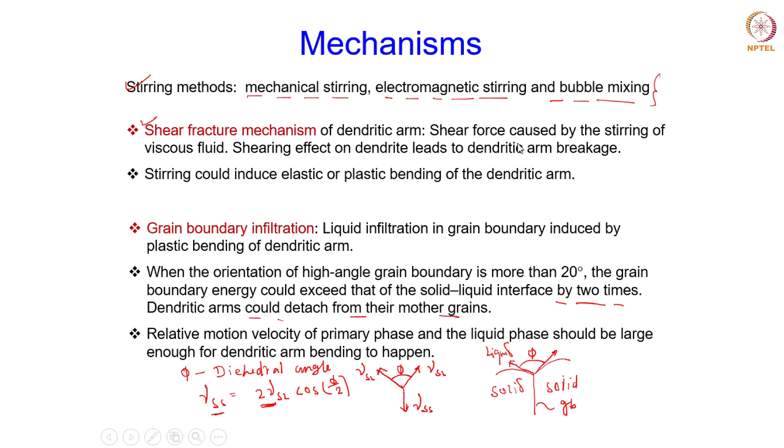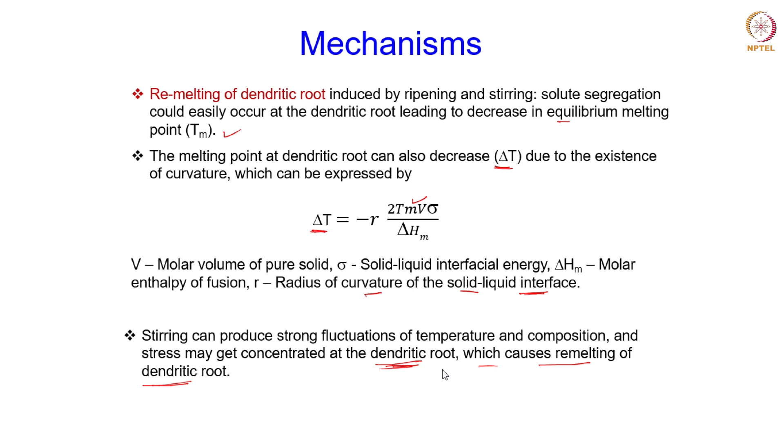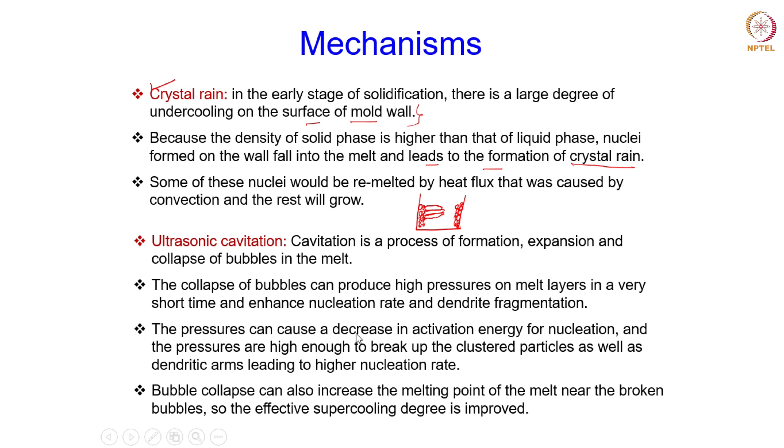Then we also talked about the ultrasonic cavitation process which is applied for grain refinement during solidification. Cavitation is a process of formation, expansion and collapse of bubbles in the melt, which basically leads to either a high nucleation rate or breakage of the dendrite arms, both leading to a higher nucleation rate or grain multiplication, and ultimately giving rise to a fine grain size in the solidified metal.

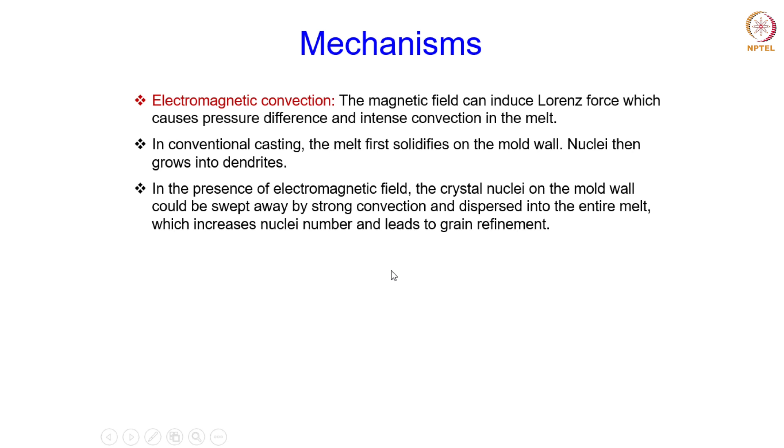So today we are going to discuss mechanisms of grain refinement which can be operational in the solid state. So we are going to discuss some solid state methods of grain refinement in this particular class today. So far we have been discussing grain refinement in the melt during solidification.

But there are certain methods through which grain refinement can be done in the solid state also, and these are basically done by applying a high amount of deformation, and such processes are known as severe plastic deformation. So that is what we are going to discuss right now and understand how this severe plastic deformation leads to grain refinement in different materials including aluminium and aluminium alloys.

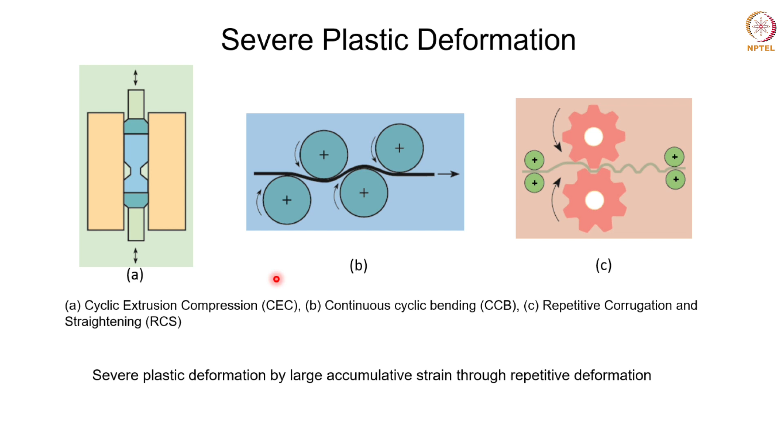Then here we have another process which again goes through a number of cycles, where the strain is also accumulative. The process is known as accumulative roll bonding. Here it not only leads to severe plastic deformation, but can also lead to bonding between two metallic sheets, as the name suggests. The process goes like this, as depicted in this particular diagram.

So you have a stack of pre-rolled sheets, as you could see. First you cut the sheets in the required size, and then they are stacked together, and this stack of rolled sheets is then subjected to rolling. And as the rolling is done through several passes, it will lead to bonding between these sheets and also severe plastic deformation, which would ultimately lead to grain refinement. But for this bonding to occur, this can be done at higher temperature.

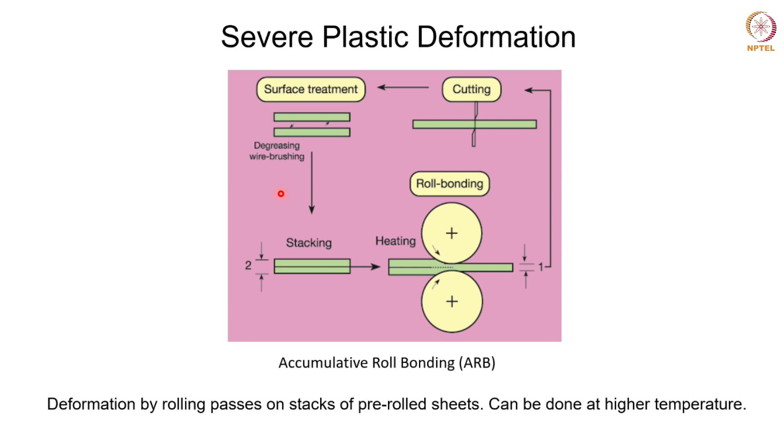So what is done over here is that this pin of the tool is actually plunged into the workpiece, and a vertical load is applied simultaneously, and the tool is rotated at high speed. So as this pin plunges into the workpiece, the shoulder will touch the workpiece surface, and as the tool is rotated at high speed, with the simultaneous application of the vertical load, a large amount of frictional heat will be generated at the tool-workpiece interface, and that will actually first soften the material.

And since a vertical load is also applied, once the material is plasticized, it will start to deform. And then as the tool is moved in a particular direction with a particular traverse speed, the material will be subjected to severe plastic deformation and it will be processed. So the material which is left behind the tool as it moves will be a processed material which has gone through severe plastic deformation and will have a finer grain size compared to the base material which is not subjected to any deformation at all.

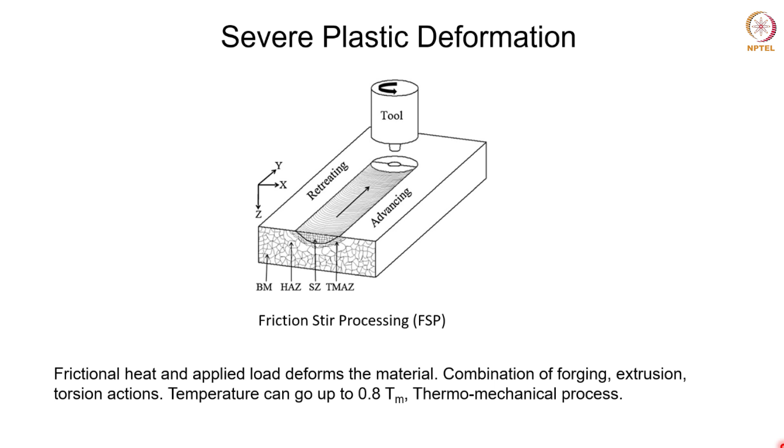So now we'll talk about the mechanisms of grain refinement, as to how exactly this severe plastic deformation leads to grain refinement. So we'll take an example of the ECAP process that we talked about before.

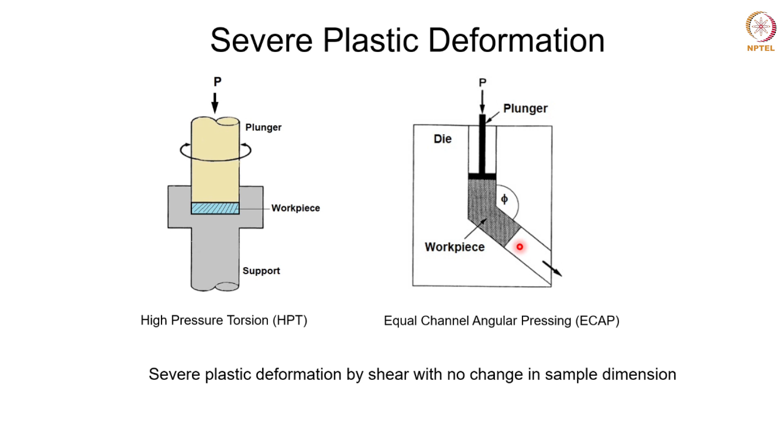Now let us see what is going to happen due to this kind of deformation that the material is subjected to in a die like this. As far as this ECAP process is concerned, there are different routes or ways in which the workpiece can be deformed inside the die, and that depends on whether it is rotated between the passes. The billet or workpiece is deformed through a number of passes, so it is a multi-pass process to obtain a large amount of deformation in the material. What is done between two consecutive passes gives rise to a particular type of ECAP process, and these different routes of ECAP are given names like this.

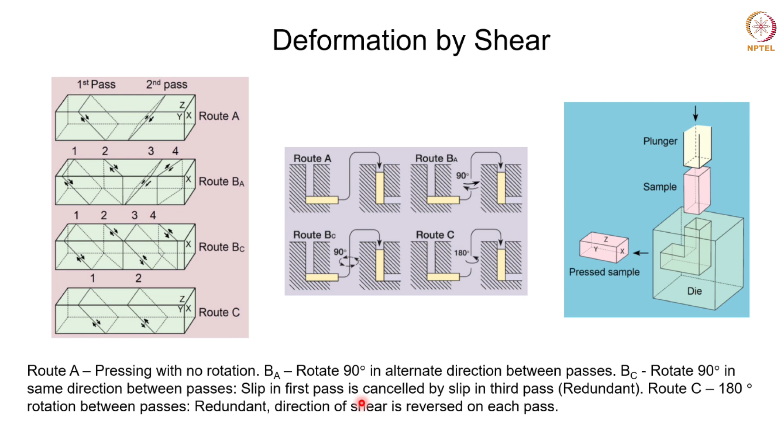And in case of route C, it is 180 degree rotation. So in every second pass, the element will be restored. Okay, so that's what I said before also. It's a redundant process. The deformation is redundant because the direction of shear is reversed in each pass, and every second pass any element inside the material is restored. Okay, because here the rotation is by 180 degrees in the same direction.

Right, so with the help of this particular diagram, you can see how the shear deformation leads to accumulation of large strain into the material, and this will actually lead to refinement in the grain size. Okay, so in order to understand how exactly the grain refinement occurs, apart from this physical picture that this diagram depicts, you will also have to look at the dislocation mechanisms.

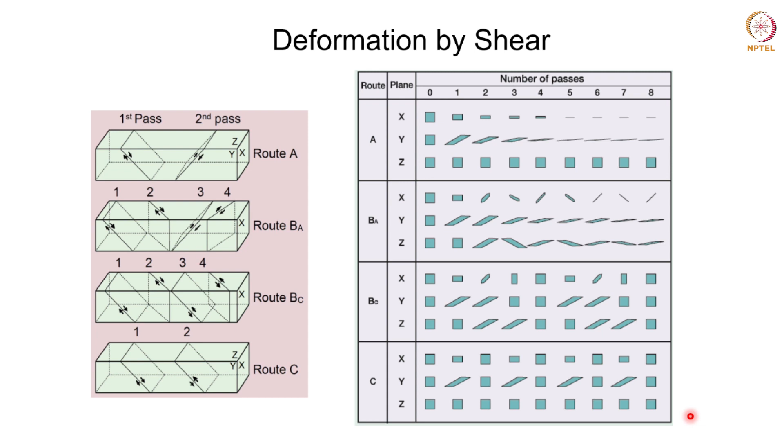Okay, so if you remember, I had said that dynamic recrystallization, which occurs in the material, can play a very important role in the severe plastic deformation process. So we'll have to look at how this particular phenomenon, dynamic recrystallization, plays a role here in case of severe plastic deformation to refine the grain size. That will be our next topic of discussion.